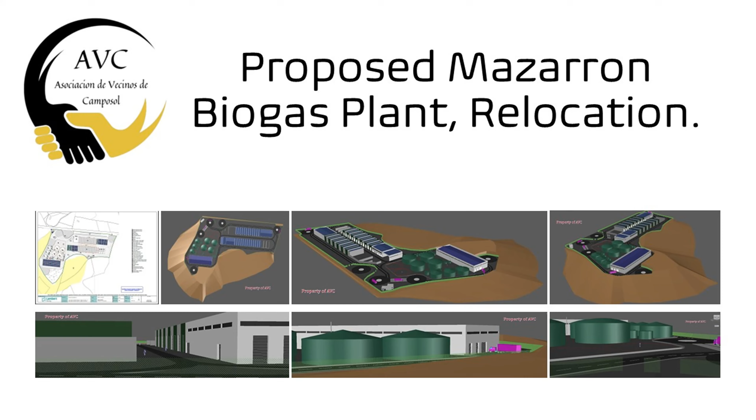The proposed location to construct and operate this biogas installation is far from suitable. The site is located within land deemed for agricultural only operations, not to be used for heavy industrial or commercial use. This would violate local planning and sustainability regulations - agricultural or green belt land should not be developed in this manner. Once one industrial complex, the biogas plant, is constructed and implemented, this sets a precedent and opens up possibilities for further industrial and commercial activities in the same vicinity.

From the plans and documentation seen to date, there has been no thought or consideration given to shielding or screening the site from the surrounding countryside. As this installation sits atop a hill, the plant will be dominantly visible for miles around from all directions. A new location must be sought, as the plant lies just 1.15 kilometres from the closest urbanisation of Camposol Sector A.

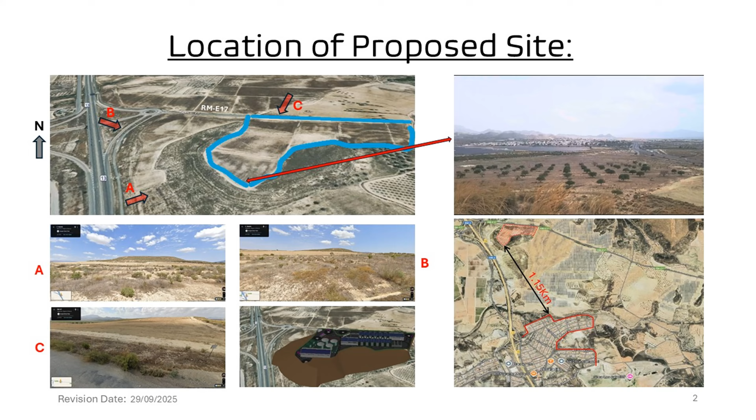As we can see on the slides, the first slide at top left shows the proposed location and its elevation relative to the motorway, the RM3. Here's a video taken from the top of the hill, 360 degrees. We've just seen Camposol Sector A, and this is the size of the field that this plant is going to be built on.

As you can see for miles, this plant will be visible from the other side of the valley. As the video turns around, we can see Sector C in the distance, and back to Sector A.

Operational disturbance: light, sound, smell and odours. If construction is achieved, further disruption will be created once production commences - excessive light pollution and excessive noise disturbance. The plant will run 24 hours a day, 365 days a year. Every night, large floodlight masts will produce very bright light pollution to the night skies. These lights, like football ground spotlights, will be seen for miles.

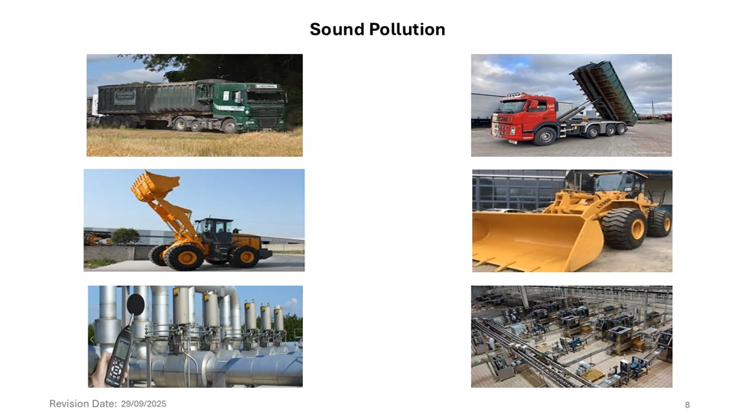Excessive sound will be generated from lorries, front loaders, reversing beacons, and general operational noise from generators, mixers, etc. Although noise calculations and metered tests have been completed in the design specifications, this is just an estimate of the total daily operational noise, not the actual volume. In reality, the extra noise that will undoubtedly travel on the wind will be a significant disturbance for residential areas that lie within that wind direction. We all agree that sound travels across the plains of Spain.

Smell and odours: to date, I have not received any drawings or documentation showing the building's internal air replenishment, scrubbing and odour control ducting to be installed to eliminate foul odours and hazardous gases. If these odour control systems are installed and the plant operated correctly to specification, there should be very minimal to no smell to consider, unless by way of accident or general power failure.

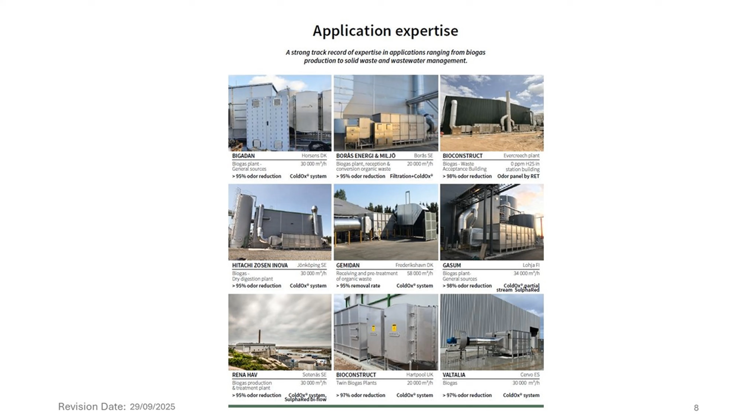The image on screen shows examples of odour control systems installed by a very reputable company that's been doing this for a very long time. Once these systems are installed, they remove all odours and gases - they get scrubbed, cleaned, and release almost fresh air.

Increase in resource usage: potable water and electricity. If this plant is approved, constructed and implemented, the daily operations will devour copious amounts of potable water to add to the feedstocks in the digester tanks, also for other activities on site like spillage clean down, safety showers, firefighting activities, etc. There is a grave concern as to the total amount of potable water this plant will consume.

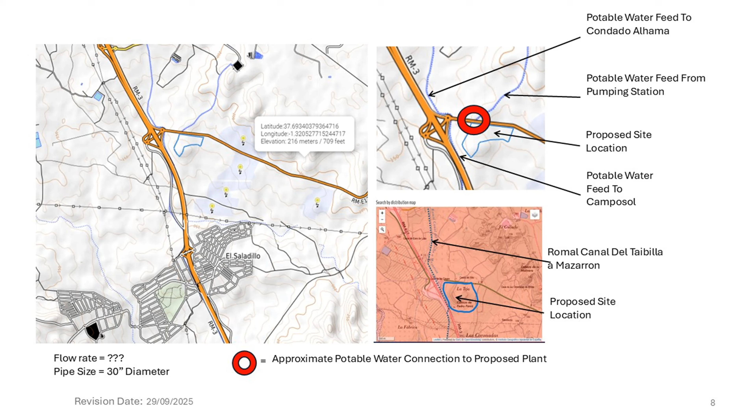This feed is coming directly from the main fresh water supply that feeds some urbanisations and local villages. Camposol suffers from an existing low water pressure issue. Adding extra industrial resources, taking fresh treated drinking water upstream of the urbanisation, is only going to aggravate this issue.

Electricity. Although this plant has many on-site solar panels to help towards its operational electricity consumption, it will also use some of its self-produced biomethane gas to help heat the digester tanks, but this plant will still require electricity feed from the local substation. A 20 kV electrical spur and new power line is indicated on the supplied documentation.

Should another local or national electricity blackout occur, how is this plant going to continue to operate safely? Will there be backup generators on site to supply power in a blackout or grid failure? And will these generators be silent running, so as not to add to the already increasing decibels in the vicinity?

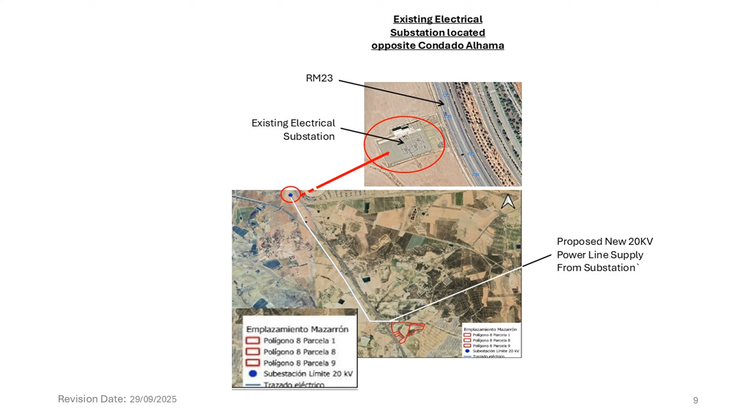The estimated travel distance is 12 kilometres from RM3 junction 25 of the AP7 to RM3 junction 13 for the site. It's also 12 kilometres from RM2 junction 4 to RM3 junction 13, the site.

HGVs are responsible for more than a quarter of greenhouse gas emissions from road transport in the EU, and over 6% of total EU GHG emissions. The first ever EU-wide CO2 emission standards for HGVs were established and regulated under EU Regulation 2019/1242, which sets a 15% reduction target by 2025. Adopted in 2019, these standards are applicable to heavy lorries over 16 tonnes with standard axle configurations, which account for approximately 70% of the CO2 emissions produced by all HGVs. The amendments to the regulation entered into force on 26 June 2024.

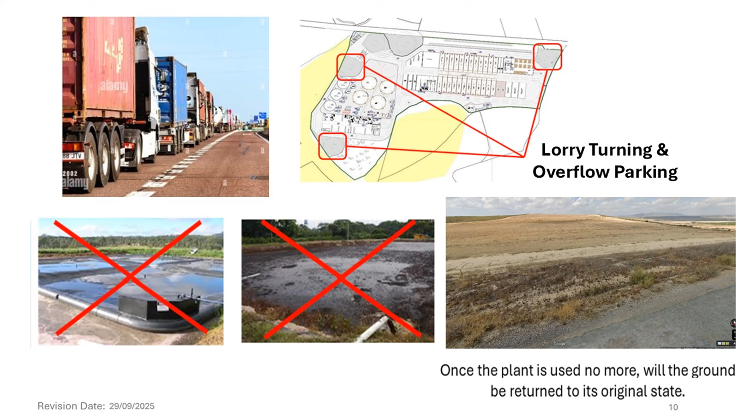Emergency processes and responses, fire protection and spillage containment. Will this proposed facility have a fire protection ring main around the site? Will this site have an independent fire tender and qualified firefighters to handle any unforeseen fires and or explosions, product leaks or unplanned hazardous gas release?

Are there safety showers on site within the access around the site to shower if an unplanned, unexpected release occurs? Is the perimeter of the proposed site bunded to contain any unexpected product release and eliminate any risk of surrounding ground contamination, making clean-up operations easier?

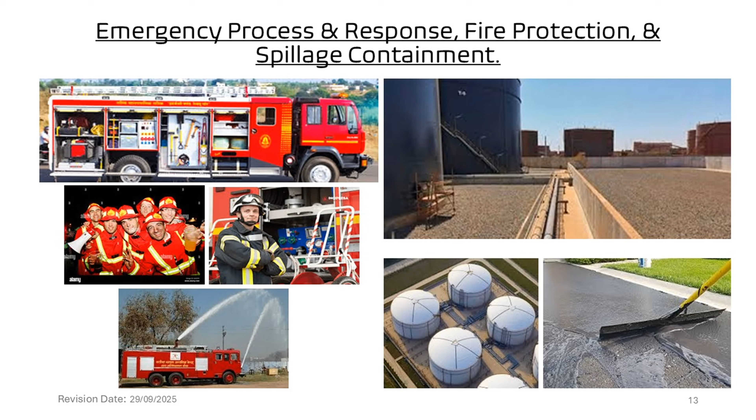Compensation to local councils or residents, farmers for plant acceptance. A biodigester plant is an excellent addition to a green cause for producing biogas and fertilisers from existing waste products. The plant proposed for the Mazarrón area will clean up the air and waste from pig farms and arable farms alike. If local farmers supply their waste for free, do they get in return fertiliser for free or at a discounted price? As for local residents, how will they benefit directly from having a huge industrial complex on their doorstep and having to endure the side effects of this operation?

The gas products produced here in Mazarrón are going to be sent up the line to be sold to other regions of Spain and maybe even sold internationally. This is great for the residents that live in cooler climates around other regions of Spain, but the good residents of Mazarrón will not benefit anything in return for the plant being built here. Other than a few permanent jobs, a majority won't benefit from gas nor fertiliser.

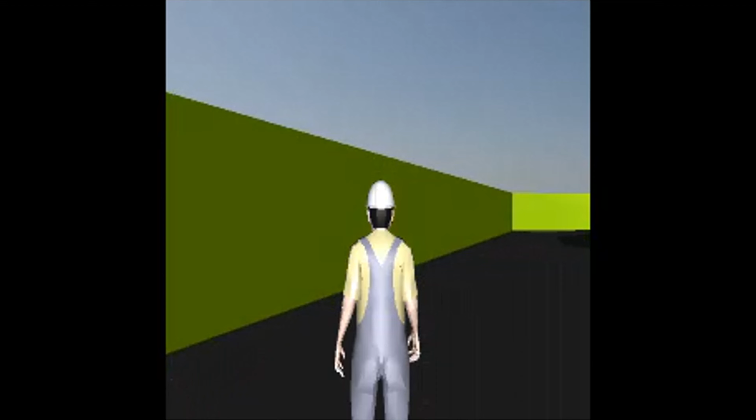This is a 3D animation to give you scale of a walk around of a finished plant. As you can see, the digester tanks are huge.

There are an existing proposed 4 digesters with a proposed expansion of an extra 2 digesters on site.

The avatar is now looking at the feedstock arrival processing building. This should be hermetically sealed and the air replenished from scrubbing air conditioning. As you can see, it's quite a large reception building.

Okay, we're arriving at the finished dry fertilizer storage pens and yards. As you can see, this corridor is full of solid fertilizer or pelletized fertilizers in their dry form. And this corridor is quite long, containing lots of buildings. So the production of fertilizer is going to be incredibly huge.

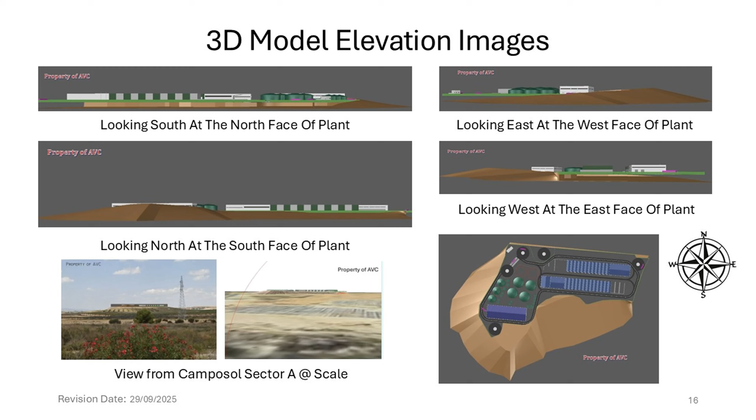Some more 3D perspective views, and you can see the plant is extensive. In the yard on the bottom right image, you could see a little man inside the bunded area standing by the tanks. This is how big these tanks are going to be. Thank you for watching.